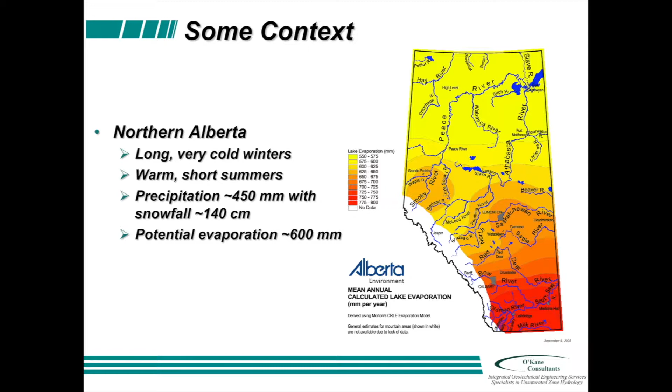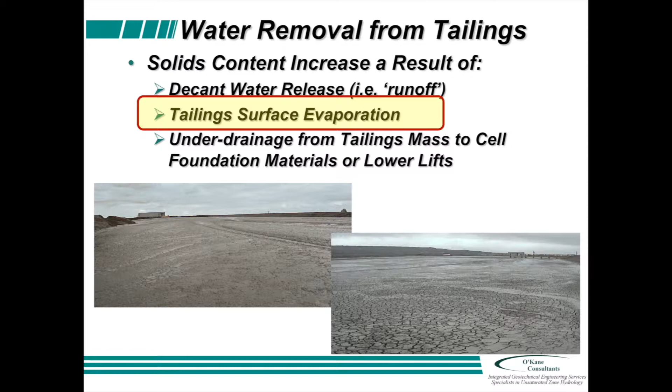How do you dewater? Well, there's decanting, there's evaporation, there's underdrainage, and we're primarily going to talk today about evaporation. The paper deals with some of those other aspects there. Just wanted to concentrate on evaporation in the interest of time. So, what attributes of the site or the area can we exploit, enhance, or combine to achieve our performance criteria? What are the big stones? What are the big things? That's one of the things that Lee Barber always talks about. What are the big stones that you can take advantage of?

And we like to think of this in the respect of, as we move down this triangle, there's more and more engineering that we can apply, and we focus in on our dewatering options as we move from the very big stone, which is climate. Climate is something that we just have to take. It's what's there. We can't do anything about it. You may be able to do a little bit about it with respect to snow melt and snowpack by wind fences, or if you have a slope on a south-facing slope, etc. But in essence, climate is climate. That's the big stone. That's the context. That's the thing that we're dealing with.

As we go through, we can alter a hydrogeologic setting. A lot of times when we do our trials, our little cells, we take and put it on sand, and then the next lift goes on top of tailings. Well, we've altered the hydrogeologic setting because we've altered the underdrainage conditions. And you can think of other ways that you might do that. And then we can spend a lot or a little bit of money altering and manipulating materials, and we can spend a lot or a little bit of money altering and managing the deposition processes. But the idea there is climate is the big one, and that's the one that we have to deal with first, because it's the big stone.

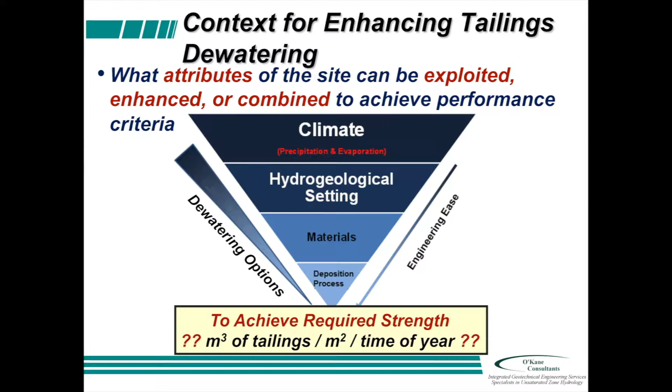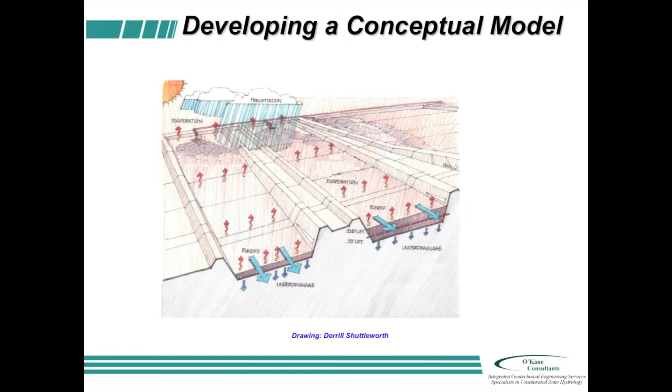And what we're after here is determining what's the cubic meters of tailings that I can place on a per square meter basis for any given time of the year. So the first step is developing a conceptual model. So here's a conceptual model of a tailings cell where I'm going to try and figure out just how much water I can take away from the system. So I place my tailings, I'm going to have my water balance. Standard water balance, changes in storage, water in, water out, precipitation, evaporation.

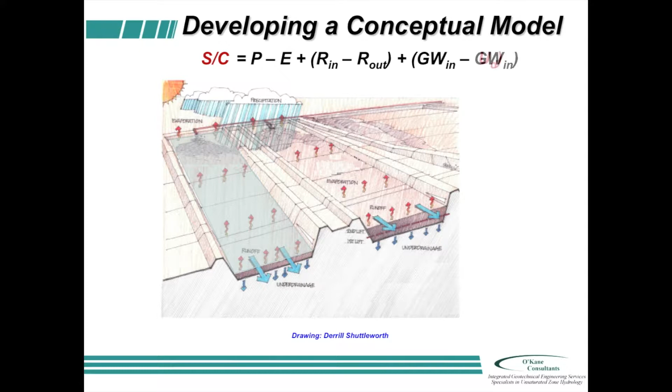Let's put it into the context of tailings management. Rather than saying changes in storage, I'm going to use changes in solids content as the metric for the example here. You can have all kinds of different metrics, but that's a metric we're going to choose here. And rather than saying groundwater out, I'm actually going to say underdrainage. So I can have some precipitation, some run-on, groundwater in, some evaporation, some runoff and some underdrainage. But the idea here is how does my solids content change?

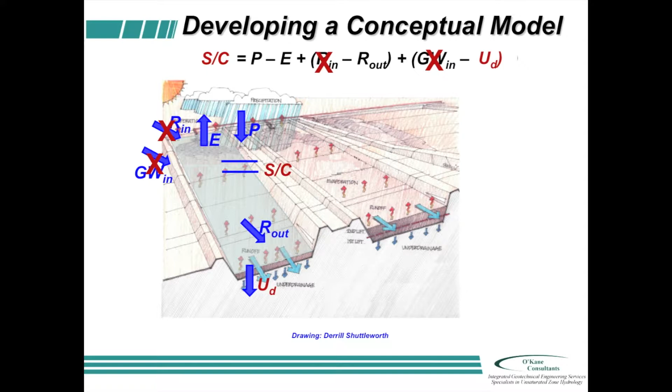And if I'm smart, I can get rid of the run-on and the groundwater in to be able to take advantage of it. I can spend a little money manipulating it, or if I can't, make sure you understand the influence of it. Okay? So I'm taking something from an initial state to a final state over time. Let's not worry about the metric here. You can choose whatever one you want to describe these two different states. We're probably going to use in this one maybe solids content or void ratio. Just make sure if you're using solids content, you're understanding your fines content, that you've normalized it.

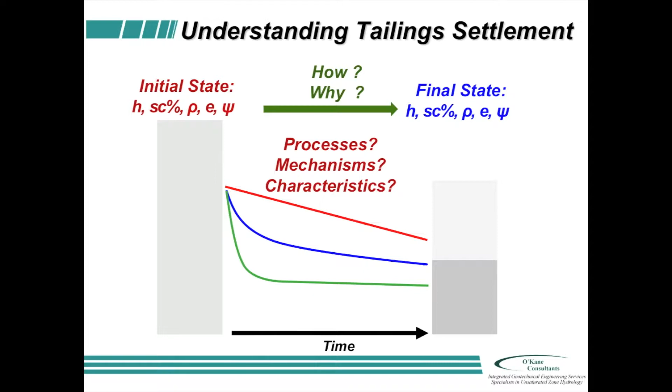And the idea is how and why does it get there? What are the mechanisms and processes and characteristics that control and influence that behavior? We're going to talk about underdrainage, consolidation, and evaporation, but primarily we're going to talk about evaporation here. So how we get there typically is through some characterization and usually some numerical modeling. But Jason's method that he's developed here is to say, let's actually take a step back. Do we want to run a numerical model that has all these different processes in it, and essentially starts to run on real time, because it's so complicated?

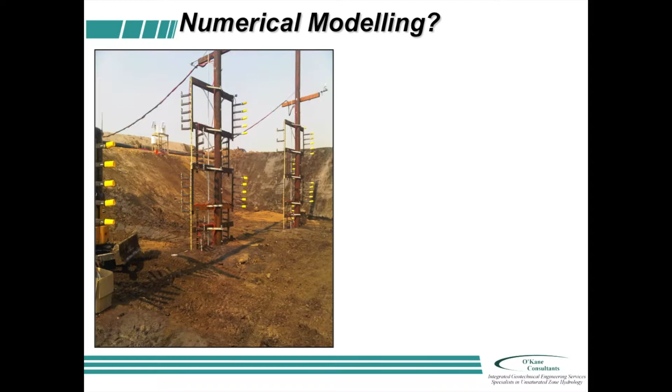And what Jason is putting forth here is, let's use that numerical model, or a semi-analytical model, to allow us to integrate in spatial and temporal variability. Those are the big stones. That's what changes and influences things the most.

So let's utilize these numerical models, evaporation, consolidation, and make sure you have the correct rules in there and the guidelines for guiding your semi-analytical model. But if I use a large climate database and model the influence of my system with respect to that database, now I'm getting the understanding of a temporal scale. And you get a bigger picture evaluation.

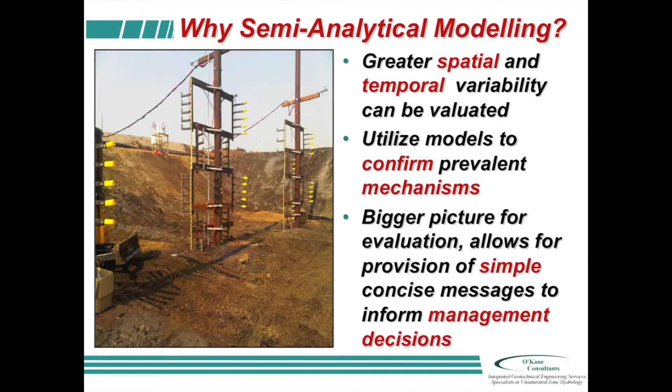It allows you to provide simple, concise messages that inform management decisions, as opposed to having a big, complex model that you can maybe run 1 or 2 years of data on, as opposed to a longer-term climate database. This is the big stone. So here's some initial conditions, right? Let's just assume what we have here. We've got to characterize things properly, et cetera.

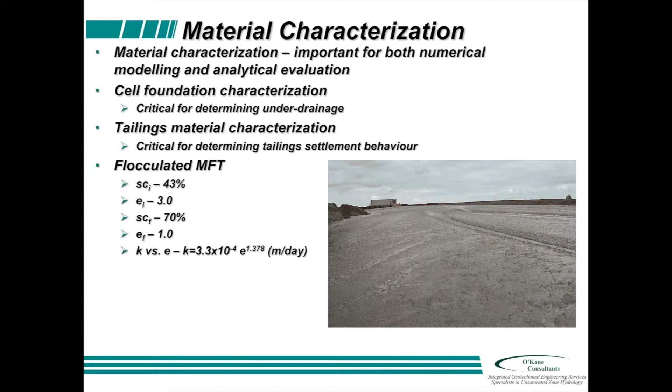So Jason is using some numbers from a lot of the monitoring we do up in the oil sands. And we're going to look at evaporative drying. We've got some initial conditions. We're going to have evaporative drying over time. And he's going to lose some water here, and how much did happen. But it's not how much happened. What's the probability of moving from my initial state to my final state, which is what I desire, and what's the probability of removing that water and achieving that final state under the climatic influences up in the oil sands?

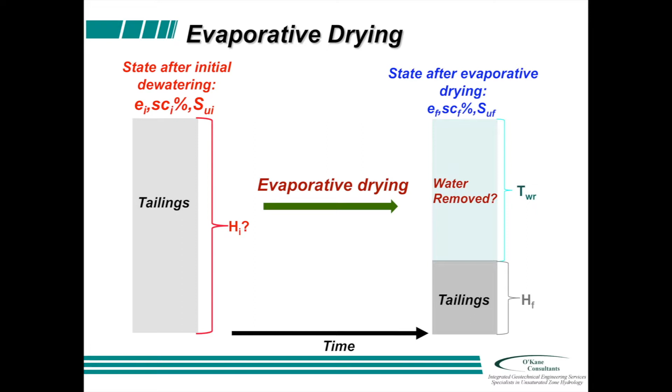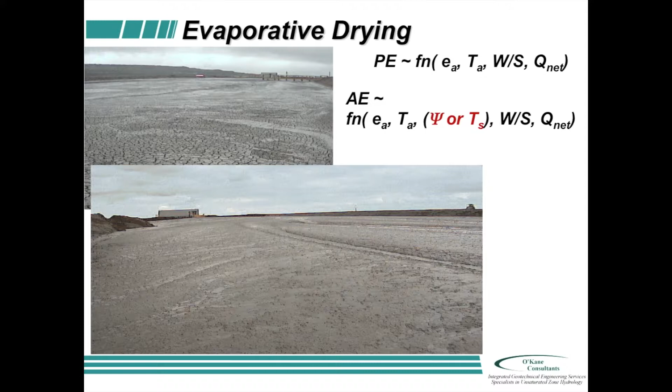So let's talk about one of the big ones, the mechanisms, evaporative drying, right? So that's a function, as we know, of vapor pressure, temperature, wind speed, energy that's available for evaporation. And then, thanks to Ward and all the work that he did over the years, we know that if we know the temperature at the surface, or really the vapor pressure at the surface, we can understand the vapor pressure gradient, and I can actually figure out what my actual evaporation rates are. And then we have to worry about that stupid salinity and cracking issue. Well, I'm not going to be able to address salinity today in the interest of time, but I am going to talk to you a little bit about cracking.

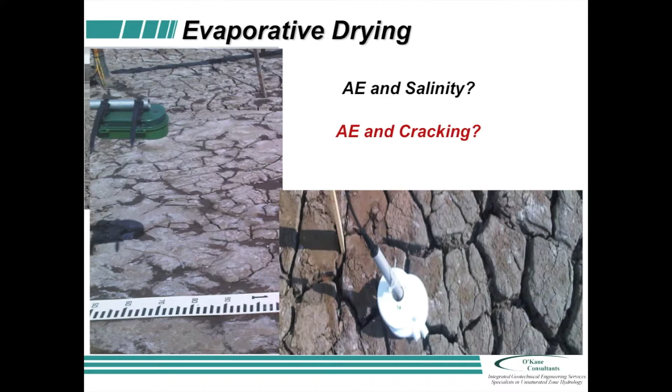So this is our conceptual model based on monitoring that we've done up in the field, up in the oil sands, and at other places around the world. We always think that we've got these cracks that increase our ability to evaporate, but do they really? In the daytime, I've got warmer temperatures outside and cool temperatures in my soil, so that influences the humidity and the vapor pressure condition and the temperature inside my crack. And if I've got cool air in that crack, what happens to cool air? Warm air rises. Cool air stays where it is. So I'm not getting evaporation from those cracks during the day.

But if I go to the evening, I've got a different situation. I've got cool temperature here, warmer temperature in my soil, warmer temperature in my crack, and I set up a convective current. Warm air rises, it takes that moisture up out of that crack, and I'm actually getting actual evaporation from the crack during the evening. During the day, it's dominated by evaporation from the soil matrix, according to the equations that we showed you before. So yes, there's an enhancement due to cracking, but it's not what some of us might have been led to believe. And we're taking that extra energy and water away through the wind speed.

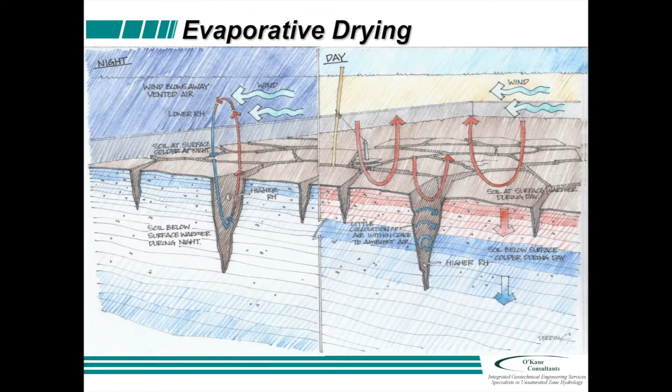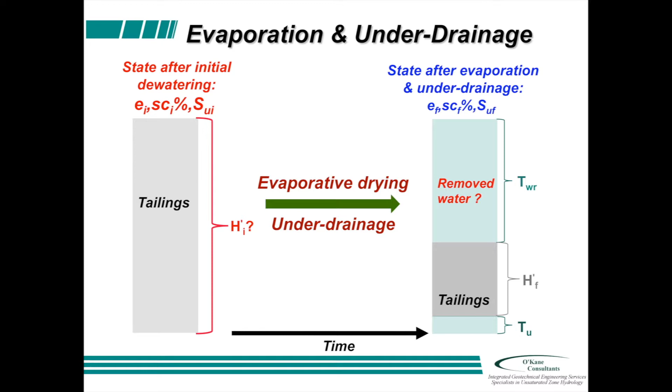So we've gone from tailings and evaporation to the evaporative water. Now we've got to figure out underdrainage. Not a lot of time to talk about this. But in essence, in our experience, initially the underdrainage is controlled by the underdrainage permeability condition, the hydraulic characteristics of that material, the initial pore water conditions, the permeability, etc. That's very early on. Pretty quickly, you consolidate that material, and it's the consolidation characteristics, the permeability of that tailings material that's going to control your underdrainage condition.

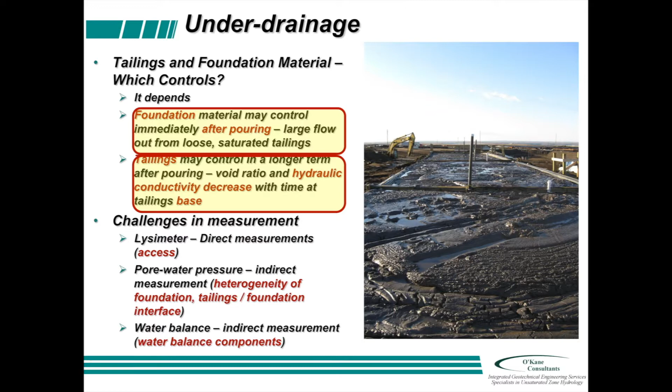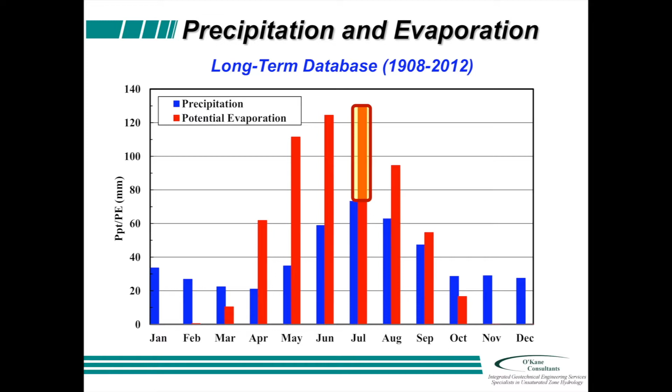And the bigger picture here is that there's some energy here that I can take and use. There's some excess energy here I can take and use to dewater tailings. But how much can I take of that? What's the probability of allowing me to take advantage of that? And if I was really smart and managed my runoff and ponding, I could maybe actually steal a little bit more energy during these hot months. So this is the probability of exceedance as a function of placement thickness of tailings for different months of the year due to evaporative drying. So I've got a probability of exceedance of 80% for the month of September.

If I put my material out at 10 centimeters thick, I've got an 80% probability of moving from my initial state to the final state that I want to be at. Right? As I have higher evaporative conditions, as I go to May and August and to June and July, my probability of meeting, say, 25 centimeters is about 80% probability as well. Right? And I'm using it. That's what happens potentially on any given year, right?

Not on the average. And this allows us to take advantage of all that 100 years of climate database and understand the response of the system to it, not apply an average year. So that's fundamentally different than doing your statistics on climate. I'm doing my statistics on the response of the system to a long-term climate variability, and that's the bigger picture. That's the big stone that we want to be able to capture. Because I want to make decisions based on probability and risk, not on average. Because then I understand where my risk profile is.

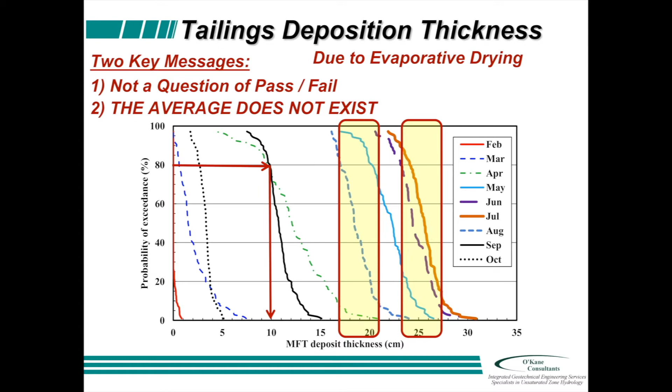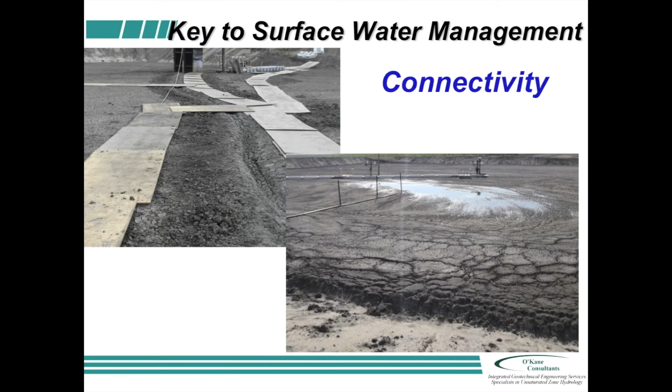The key to surface water management, remember we talked about trying to take advantage of that little bit of extra energy that might be available? Well, the key to water management for these tailing storage facilities is to understand connectivity, right? We've got these fairly flat surfaces, and they will pond water. Right? So am I in a situation where on the left-hand axis I've got shallow slopes and then maybe steeper slopes on the right-hand side over here. On the left-hand side I'm filling my little holes and crevices and cracks, and my fulcrum, my balance of fill and spill, is way more on this side. So basically I'm not getting rid of that water. Any energy that I do have is taken up evaporating ponded water as opposed to dewatering the tailings.

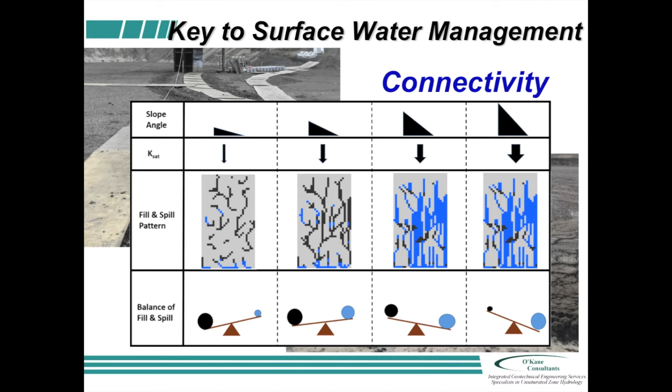Or can I set up a system and engineer the system and spend a little money and get myself over to the far right over there, where I've got more spilling happening, and now I'm actually taking that water off the landform. I'm not wasting my evaporative energy, and I'm actually using it to dewater tailings. So the key points, one key point: don't use a pan evaporation system. It's just a bad way. Just measure the climate and figure out what potential evaporation is.

But another bigger picture thing is first, develop a conceptual water balance. What you see there is a conceptual water balance for one of our clients. It talks about how much underdrainage there is, how much water you're losing from decant initially, and what's the evaporation that you can sort of count on as you move forward for different months of the year. That's based on a bunch of measurements. Each and every year, conduct your field monitoring to update that thinking, update that conceptual model, and see, do we know any more? Is there another mechanism or process that we can add into this to be able to learn about and include it in our bigger picture conceptual model?

And you can go to the lab too, but make sure in the lab that you ensure spatial and temporal scale are realistic, right? We don't get the kind of cracking in the lab that you get in the field because of a spatial scale issue. We don't get the kind of temporal things in the lab because we're trying to evaporate things and apply, rather than say 3 or 4 millimeters per day, 6 millimeters per day to make the lab program move along faster. So the method that we presented, I think it allows you to take advantage and think about the spatial and temporal influences of climate. That's the big filter, the first filter we need to move through, right? And it allows us to take the longer climate database rather than having a really big super fancy model that does everything but isn't able to model in real time.

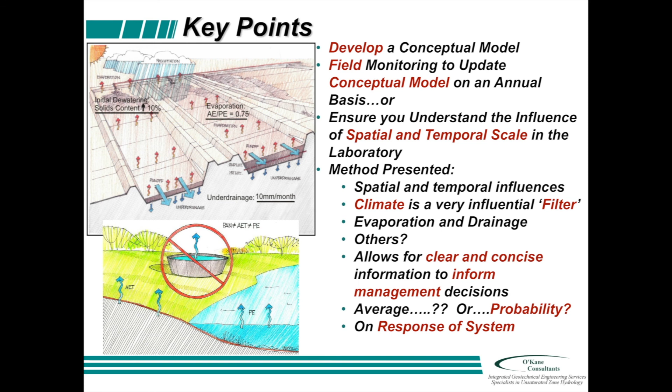We've showed you how you can apply this model to evaporation and drainage. Jason's got a lot of other things in his pocket to talk about, you know, thaw consolidation, all the other kinds of things that you might want to talk about. It's transferable. We helped the folks down in South Africa, SLR, help one of their clients using this model. Different rules for evaporation, different evaporative rates, but it's still initial, final, what's the probability of getting there for different thicknesses of material. And it allows for clear and concise information to inform management decisions, because it allows you to have a probabilistic approach rather than designing on the average, because the average doesn't exist. And it's based on the response of the system, not averaging and doing your statistical analysis on climate.